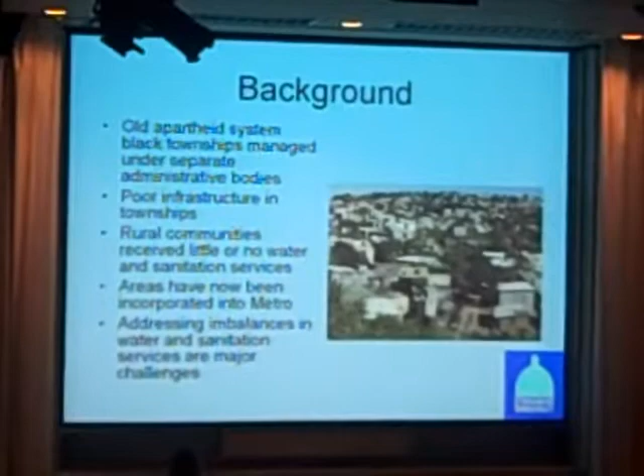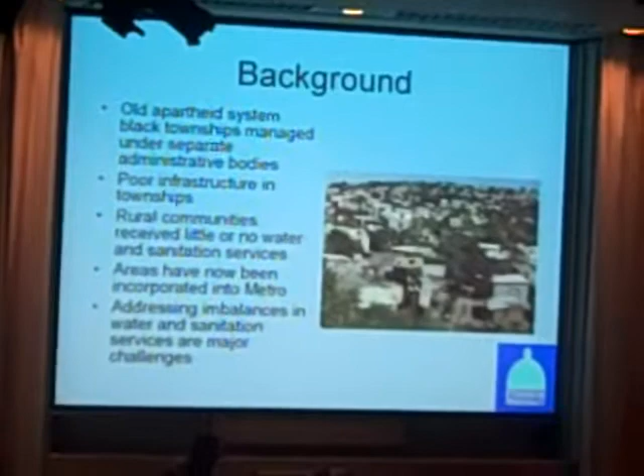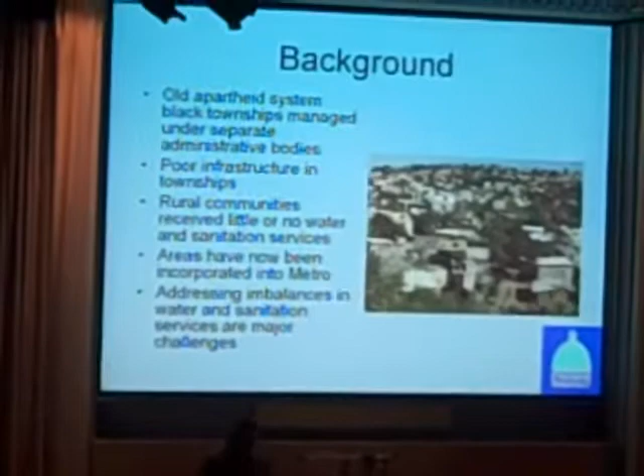Generally, the connection fee is around about 3,000 rand per connection. You can do the conversion. The rand is 11 rands to a euro. The semi-pressure or roof tank, low income, their connection fee is 500 rand. The ground tank or the yard tap to rural dwelling, that is given to basic water and sanitation, and they're free of charge. The flow limiters, where it's installed onto defaulters who don't pay the water bill.

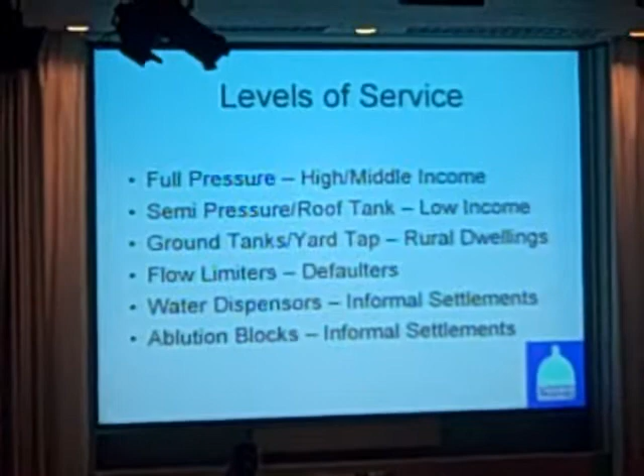Water dispensers to informal settlement. We've got a large sector of informal settlement. There's about plus minus 200,000 informal dwellings occupied by close on to 800,000 people. We've started introducing ablution blocks to the informal settlements to address their water and sanitation delivery.

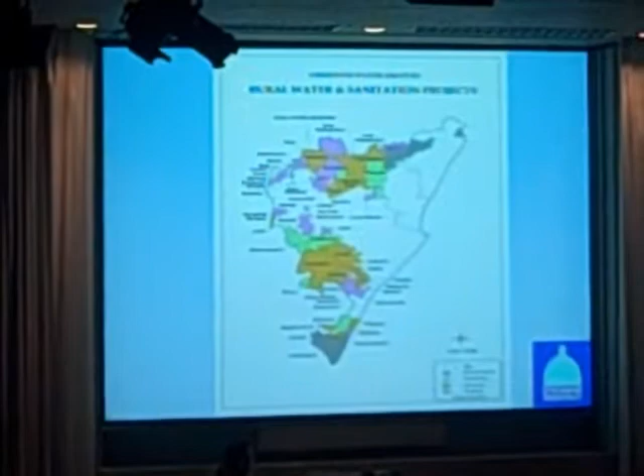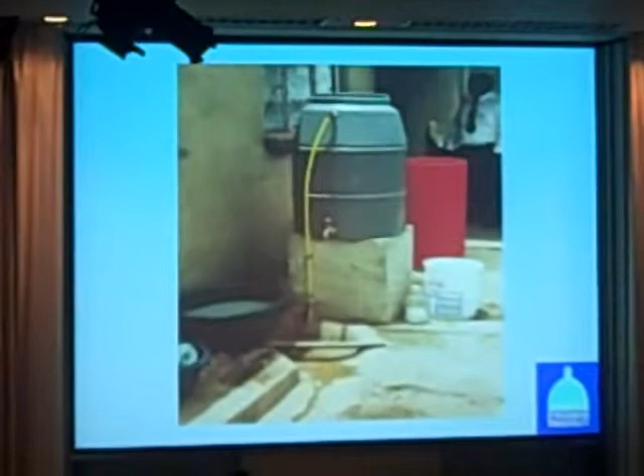What happens here is that we use an electronic timing device. The electronic timing device switches on at 12 midnight and shuts off at 2 in the morning. So within that period, the tanks will fill up in the rural areas. What it does is, it reduces the capacity of our main reservoirs in the urban areas.

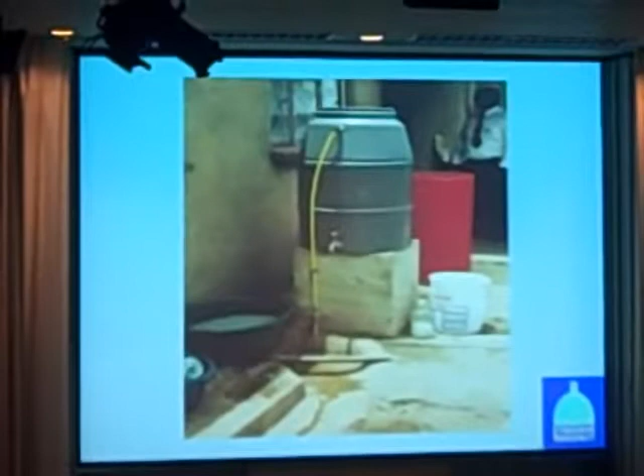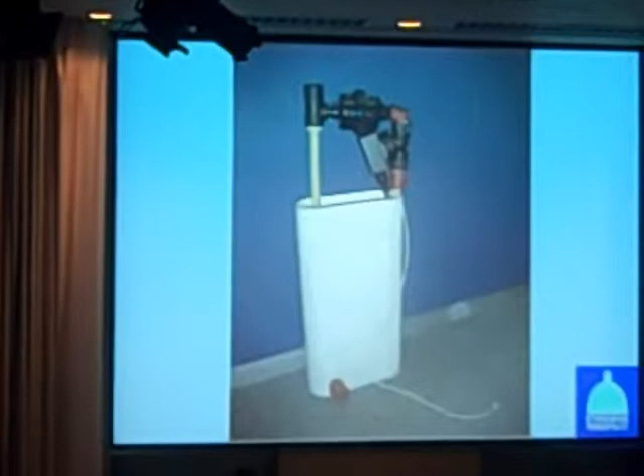This unit here is a unit that we installed for the defaulters. If you'll see, that's the meter there, and below the meter is a restrictor. That restrictor is a computer device. That computer device then allows only 200 liters of water to pass through. So if a defaulter doesn't pay his bill, we're going to install this here. We give him a lifeline free of charge.

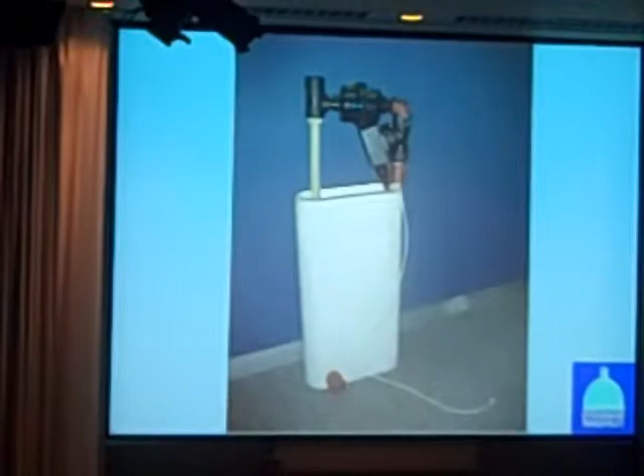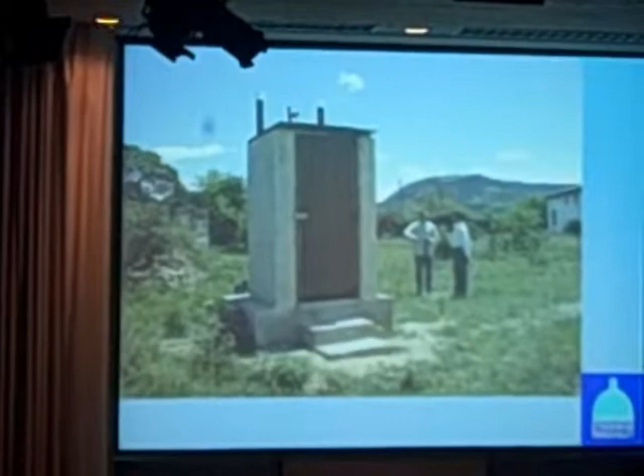Very good concept. It's based on the Ecosan technology. It's called the urine diversion. At the back of the urine diversion are 2 vaults. The urine diversion technology basically is the separation of urine from feces. The feces is allowed to go into the vault and then decompose. By the decomposing process, it destroys the pathogens.

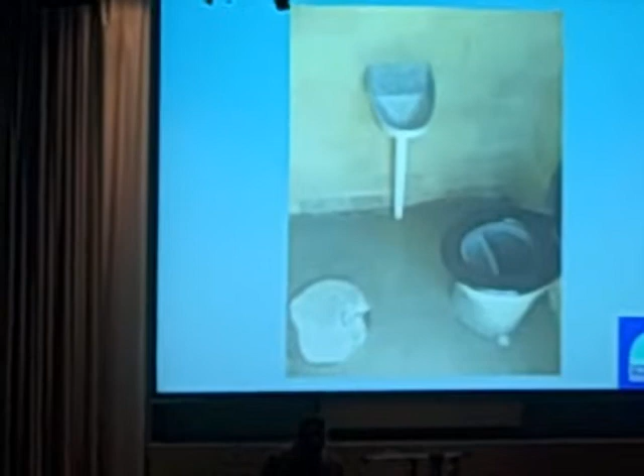What happens when a person sits on the toilet? The front chamber there is used for urinating, and the back chamber is then used to fill the vault. Along the wall there is a urinal for the males to use.

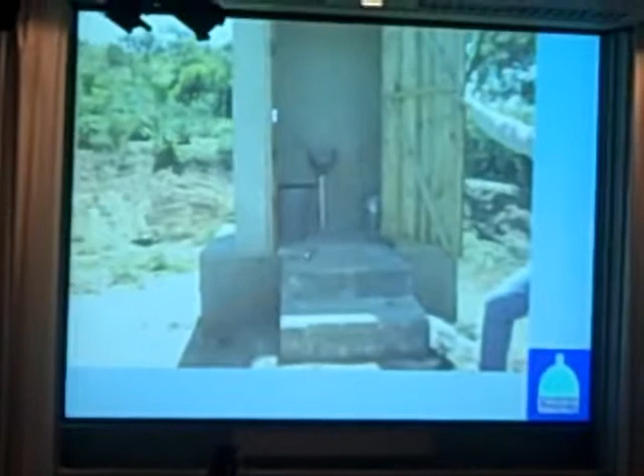What happens in this process here is once the first vault fills up, we'll then take the pedestal and move it over to the second vault. Use that cap to close up the first vault. And 12 months later, when the second vault is full, we will then remove the contents of the first vault and then change over the pedestal to the first chamber. So this process goes on.

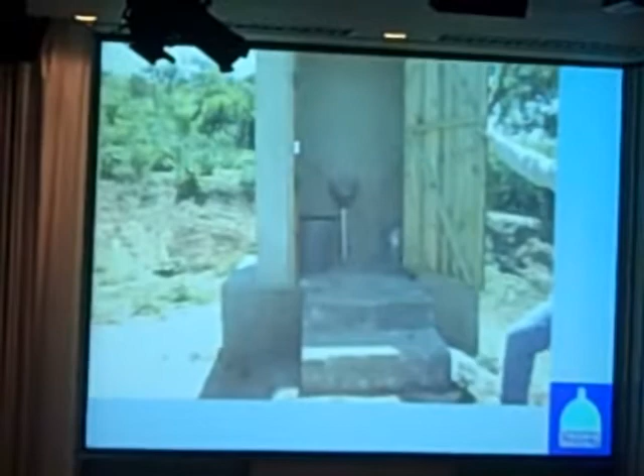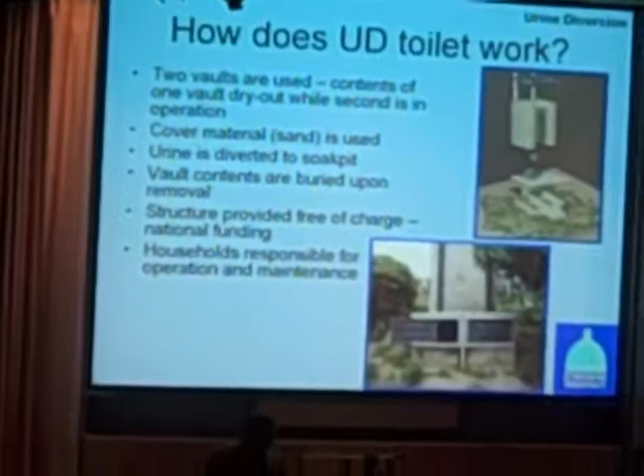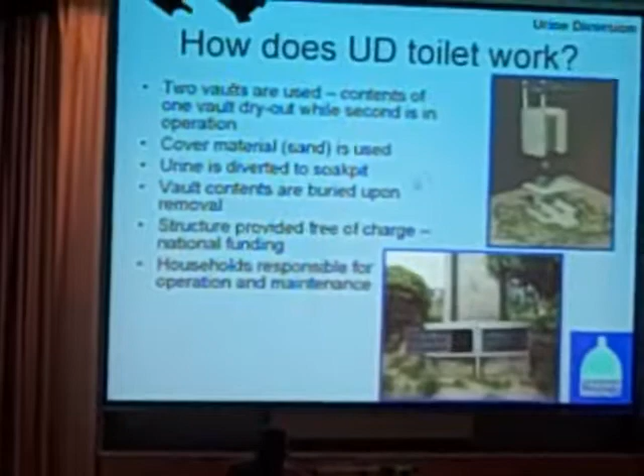An important thing about the urine diversion toilet is that it relieves the municipality of maintenance. There's no maintenance because the householder now becomes responsible for the operation and maintenance of the structure. The back here, you can see the back covers that could be easily removed. We have installed about 80,000 of these, and we've got almost 90% success in terms of usage of the toilet.

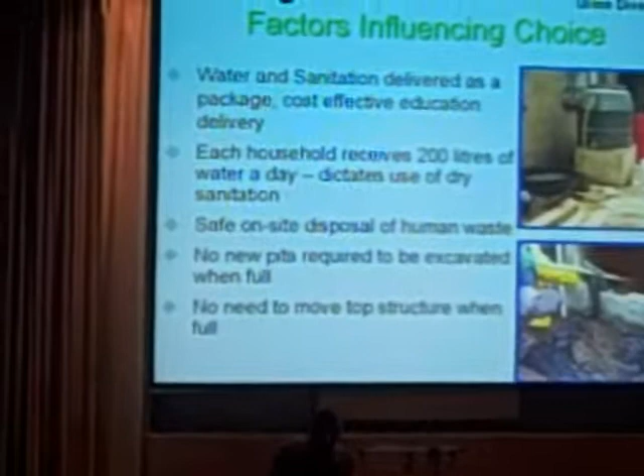Factors influencing choice: the water and sanitation delivered package, cost effective, education delivery. Each household receives 200 litres which they can use for washing and the toilet. Pit latrine excavation, a major challenge.